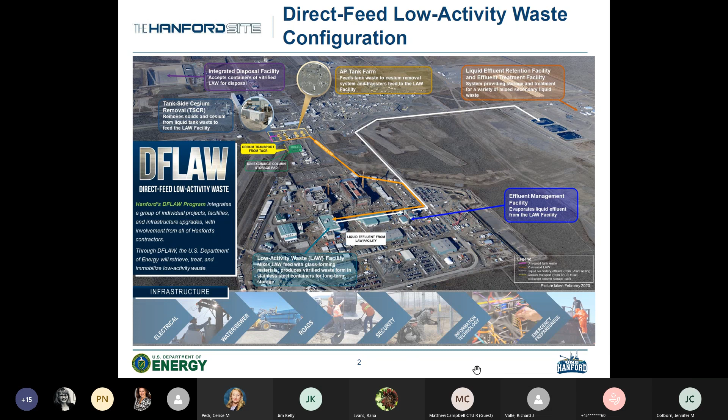So this puts some of that verbal discussion from the previous slide in text form. We recognize that there's chemical and radioactive waste stored in Hanford's tank farms. We see the graphic showing a typical tank with its liquid and solid fraction, liquid in blue, solid in yellow.

Through the DFLAW program, DOE will efficiently and effectively vitrify waste, immobilizing it in glass. We talked about the generation of secondary liquid waste from the glass-making process, and ultimately the LERF and 200 Area ETF being used to manage and treat that secondary liquid waste. It's important to note that during DFLAW, DOE will be treating the liquid fraction of that tank waste, as we said prior.

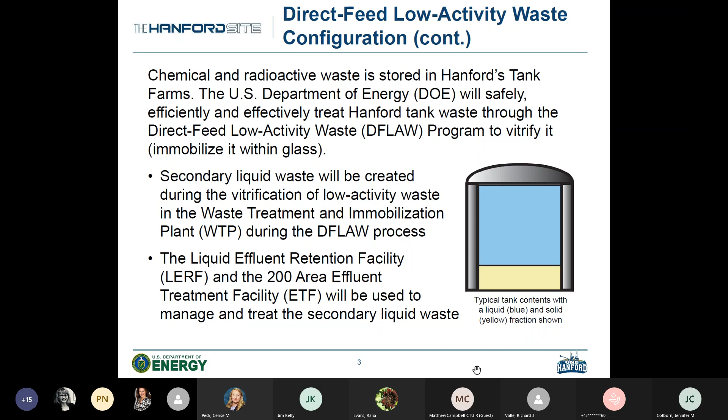Some more background, and here we talk to the regulatory framework. At the Hanford site, we are governed by the Resource Conservation and Recovery Act, or RCRA, a federal regulation, which is flowed down into a dangerous waste permit for the Hanford site. The Washington State Department of Ecology is the regulator, and we're currently operating under revision 8C of that permit.

DOE, and in this instance our contractor Washington River Protection Solutions, are the permittees, and we're going to discuss a proposed Class 2 permit modification to this particular unit group, the LERF and 200 Area ETF.

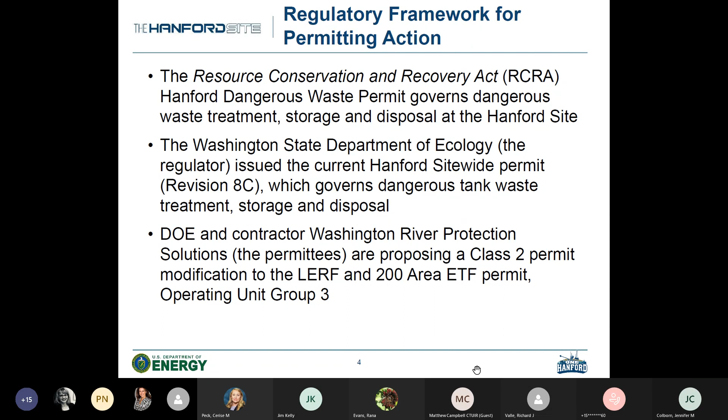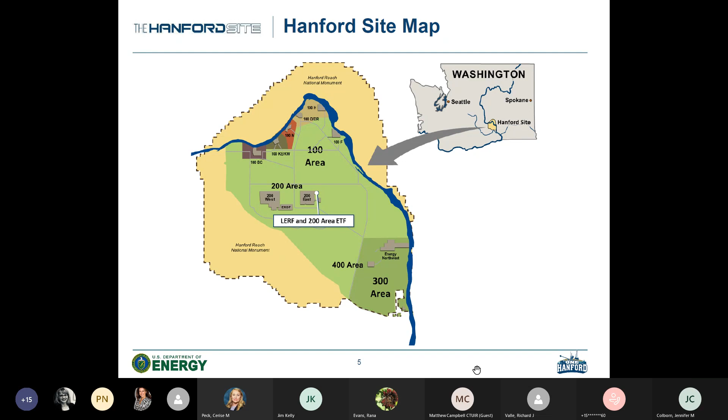Here we give you some visual context of where that unit group we'll be discussing in detail is located. We have Washington State with a callout for the Hanford site. Right in the middle of that graphic is the 200 East Area, and in the top corner you can see the general location of this unit group, the LERF and 200 Area ETF.

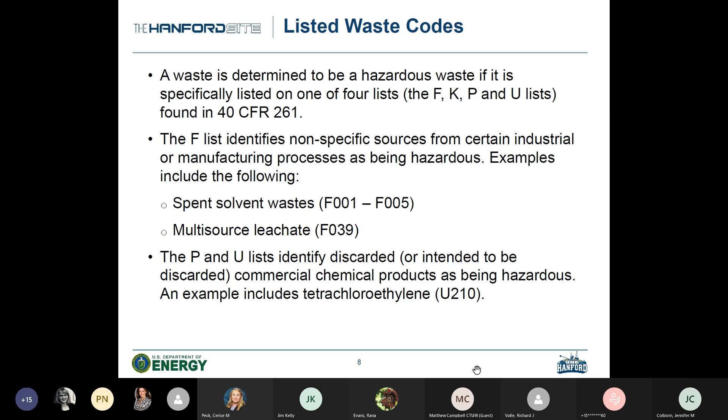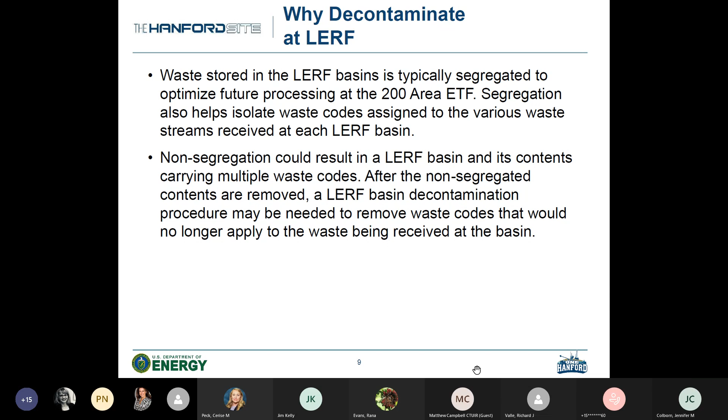And I know that was a little wordy, so the next slide is an example to try to put that into context. Next slide, please.

So here's this hypothetical example for LERF. Again we've seen this graphic, LERF being at the top there, comprised of the basins. For this particular hypothetical example, if we assume that we want to remove the cover from LERF Basin 44 so that we can replace it, we would have to transfer the contents from 44 into 42. So when we do that, let's recognize what we have in the basin.

The first item in the call out at LERF Basin 44 shows F039 listed waste. So we're going to be transferring that, following the arrow, our first transfer into LERF Basin 42. First call out in the LERF Basin 42 bubble shows F1 through 5 listed waste. So after our first transfer, we now have removed the contents from 44, but the basin is still F039 listed waste. And then in LERF Basin 42, after the first transfer, we have F1 through 5, as well as F039. So that's where we stand after the first transfer.

Now, if we assume the cover replacement is complete, we want to reintroduce waste back into LERF Basin 44. So we'll transfer out from 42 into Basin 44, and that's what's shown as the second transfer, the arrow going back into 44. So after the second transfer, we'll see that now we have F1 through 5 and F039 at Basin 44, and similarly we have those same waste codes at Basin 42. So if we wanted to remove the F039 waste code, which is highlighted in that call out, we would be performing the Decon procedure that we've developed, and then after the decontamination you can see the F039 code is removed from LERF Basin 42 in this example.

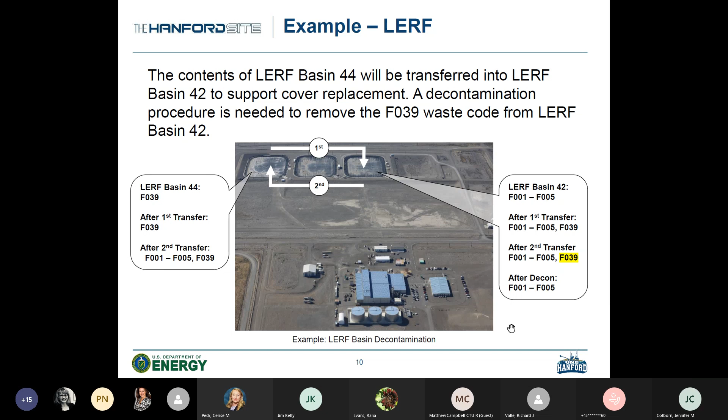Similarly, why would we want to decontaminate at ETF? Again, providing some context and background for the first bullet there. ETF generally processes waste from a particular LERF basin in what we call a campaign, and each campaign is typically limited to the contents of a single basin. We develop a specific processing strategy for that campaign. So performing campaigns from different basins could result in the 200 Area ETF tank system carrying multiple waste codes. After a campaign is completed, an ETF tank system decontamination procedure would be needed to remove waste codes for the subsequent campaign that no longer apply.

And again, we'll try to do something similar on the next slide to try to convey this with an example. So next slide, please.

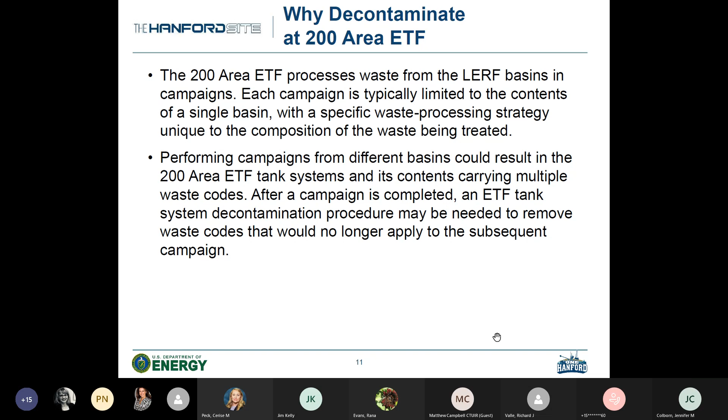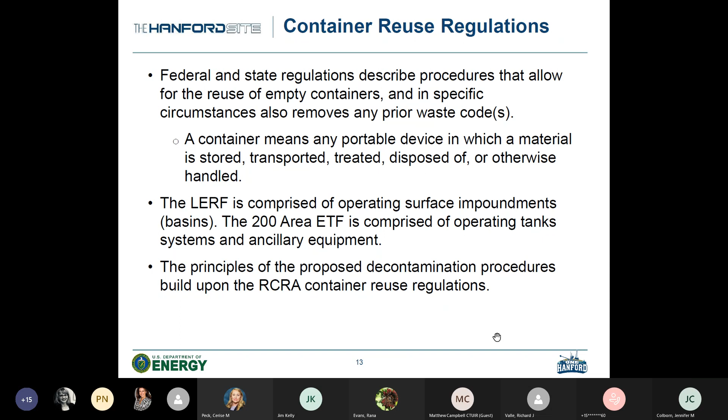At a high level, that includes sampling, calculations of a flush volume, and then performing flushes. There are particular caveats for LERF and ETF. I would encourage you to go to the actual permit section and read the steps for the specific details, but that provides a general highlight of the decontamination procedure.

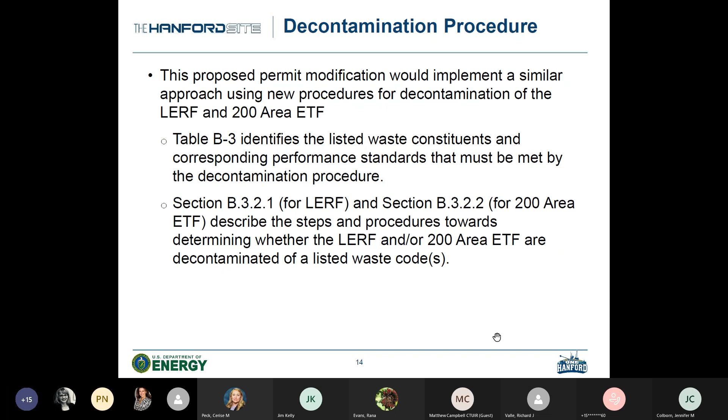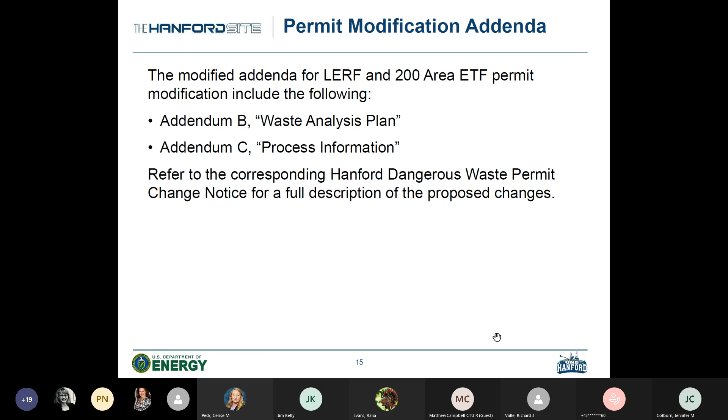As we've mentioned previously, specific to the LERF and 200 area ETF, this is a Class 2 permit modification. There's a corresponding 60-day public comment period, and it's currently open and will run through the 27th of December. Please submit your comments either physically or electronically through the means noted below.

And with that, I think the next slide will open it up for questions. So next slide, please.

Richard, thank you for doing such a good job with the presentation and explaining it to us. And I see Susan has just turned her camera on, and if you can hear me, Susan, I believe you were first in the queue.

Please go ahead. Thank you, and thank you for this presentation. I have absolute confidence that you know what you're doing, but much of this was so technical that when you talk about removing the waste code, does that mean you're removing waste or just removing a code by which you dispose waste? And is there any output from the LERF? You talk about transferring and decontaminating and all that, but eventually there's some stuff left. Is there a plan for disposal of that? And maybe there isn't something left, and I don't quite understand that. Thanks.

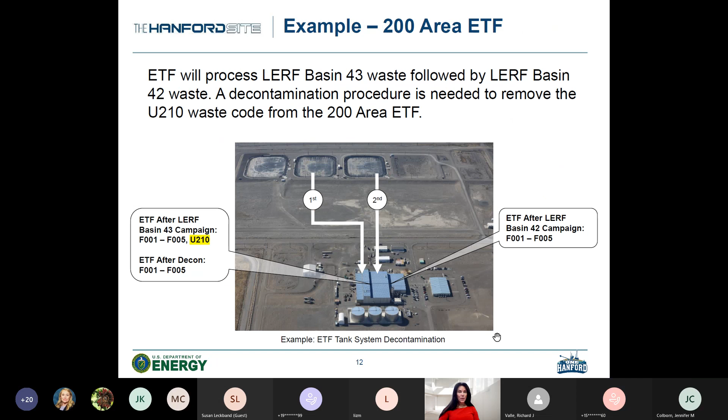Would it be helpful if we went back to one of the other slide examples? Would that help the group? We can certainly pull up the aerial view of ETF. Yep, that will help. I think there's a more zoomed in version up above. Okay, maybe not as zoomed, but still.

So you can see those at the bottom of the aerial view there. There's 3 tanks, those cylindrical units there. Those are the verification tanks. So they're at the back end of the effluent treatment facility. As we're processing waste, those will be used to accumulate the treated waste that will be verified as treated and ultimately discharged to the ground if they are verified as being treated. Like we noted in a few of these questions, in certain circumstances where we need decontamination flush waters, we will be using the verification water.

All right, thank you, Richard. And Jen, thanks for pulling up the picture. It helps me to look at the pictures, see what's what.

Colleen, it looks like we have a few more follow-up questions in the chat. Yep, the next follow-up is from Maya Burke. Do you test the heel after flushing to confirm it meets the decontamination performance standard?

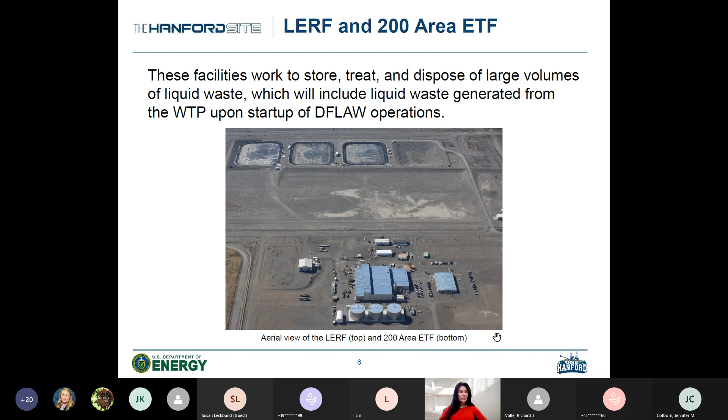I'd have to go back to the particulars for LERF in this instance. Sorry, Maya, if you want to put that question in an official comment, we'll get that answer to you.

Right, thank you. And then next from Susan Leckband, does anyone from ecology have anything to say about this change?

Hi, this is John Temple with Ecology. Are you guys able to hear me? Hi. Yeah, we can. Yep, for this one, Ecology, we understand the flexibility really LERF ETF needs when DFLAW becomes operational.

So specifically for this decontamination process, we've been working with DOE and WRPS for almost a year now to develop an acceptable approach for decontamination. As part of this, we included our headquarters and part of the discussions, our compliance team, and EPA as well. So I feel like we did our research, our due diligence, and are comfortable with this approach and that it's protective of human health and the environment.